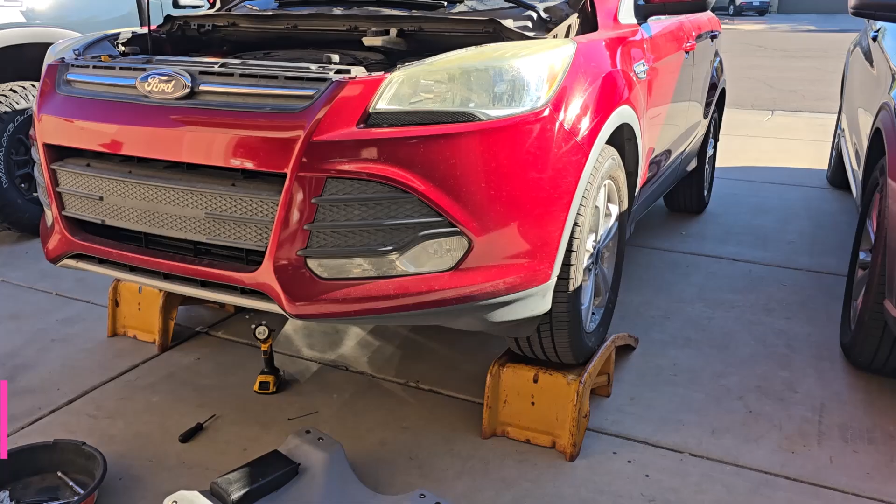Check out this car, let's see if I can find where the boost leak is, because my daughter's still getting some issues with the car. Besides the blatantly obvious failed battery.

This is the boost charge pipe after the intercooler. This is where I mended it before. It blew out right here, so I cut it and put this piece of metal pipe in there with just these two clamps, stuff I had from before for my turbocharging projects. But of course, this is a factory turbocharged car. Looking right there, I believe I see a new split before I even get this hose off. Look at that, that's probably where it's flowing out.

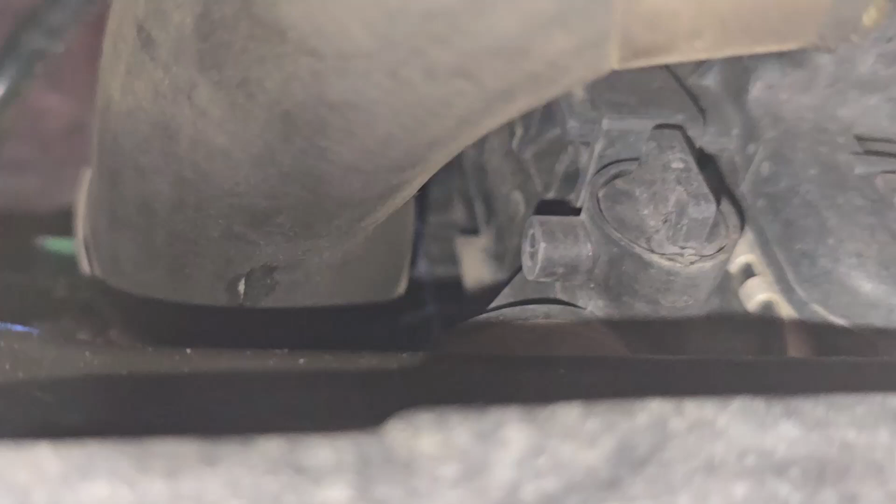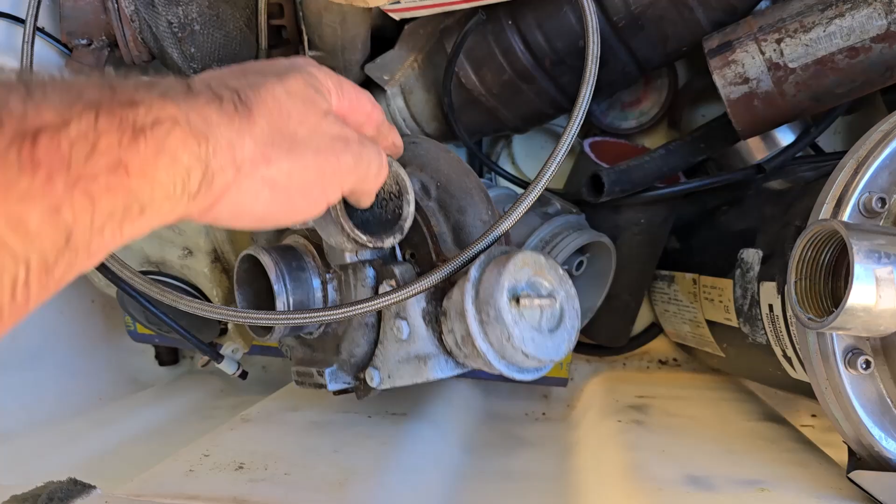So out in the back 40, where I have a tote with some old spare parts from previous projects, there's a nice little turbo. It was on that Saturn. There's the turbo, it was only a T3 flange. That was on that Mustang. There's a 3-inch outlet there.

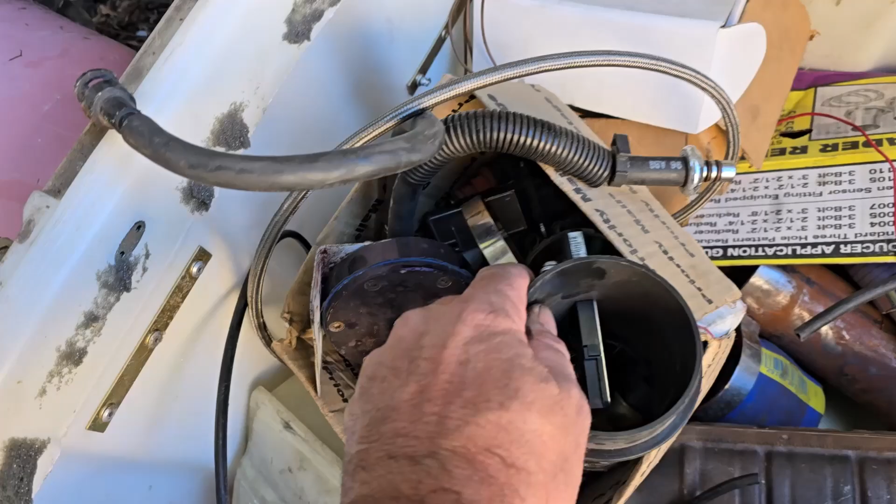Here's the wastegate, the external wastegate. Oh, there's a section of... this might have been the aftermarket airflow sensor. No, that was a stock one. Somewhere here's the aftermarket one, it started melting from getting it so hot. What was this one? Yeah, this is a $300 sensor right here.

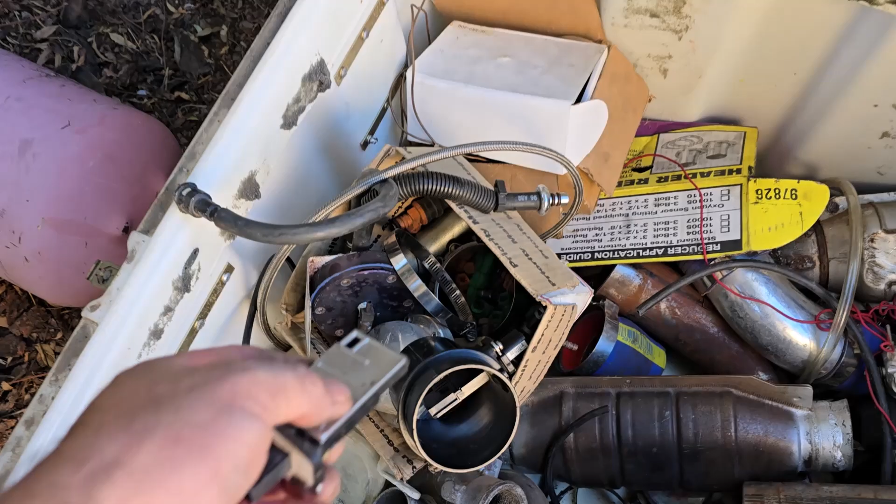Pro M, still good, who knows, might work on that Ranger. Fuel pump, that was a high pressure fuel pump down there. It's been sitting for years now, huh? There's the blow off valve, it was on that 3-inch pipe there.

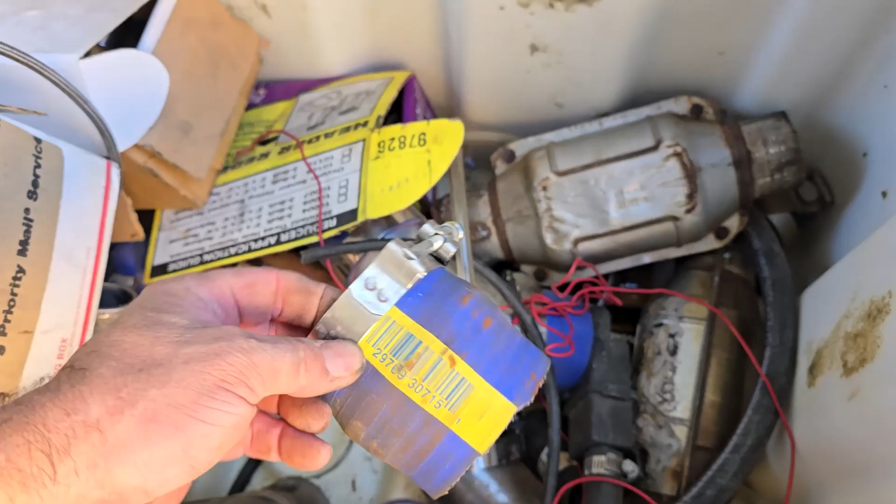We got a converter that's not hollowed out, it's a real one, this is what I'm looking for. I'm trying to see what hose connections. Oh, this is on intake, that was an air straightener I put on there. Air straighteners, after you come out of a turn like this, I kind of like that because I would put laminar flow or whatever they call it across the mass airflow sensor, to get you a better reading.

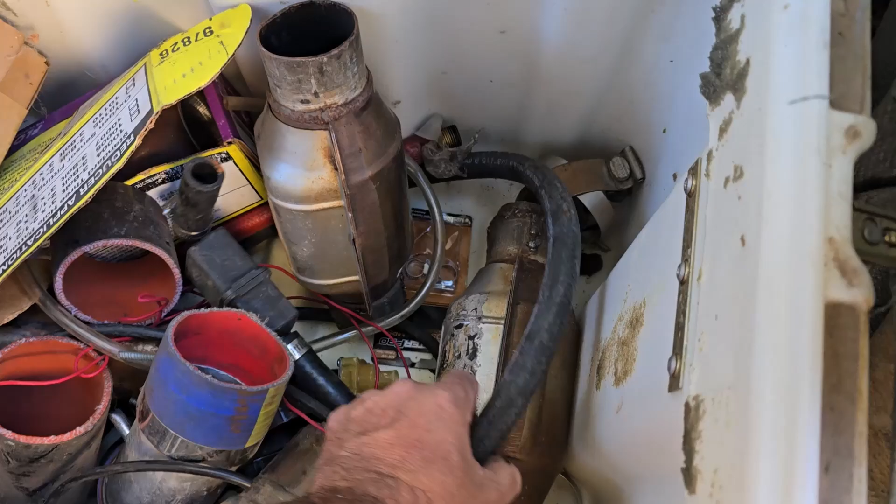So I'm trying to see, I've had rubber hoses, just wondering if I had any of that size and any decent lengths. No, that's massive, that's 3-inch. It is not 3-inch that I got on that. There's another one down here. Yeah, it's all, these are all too big. And there's more cats, these are high flow cats? Yeah, I think those are the high flow cats.

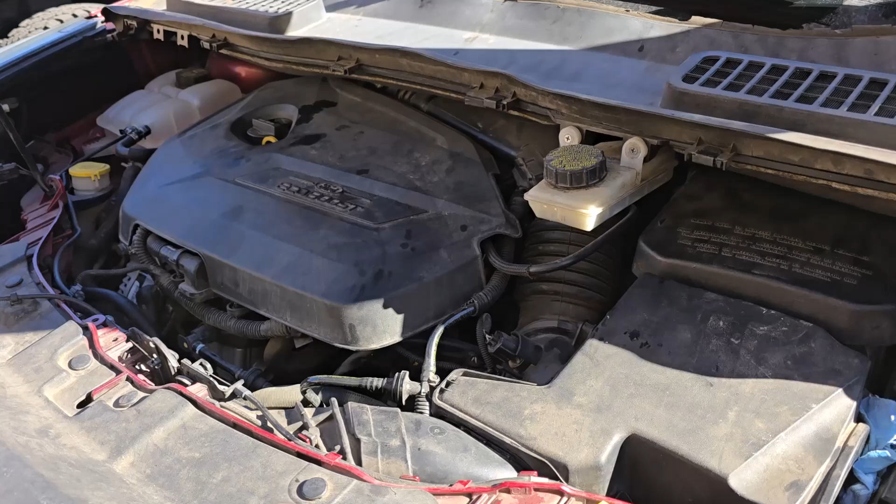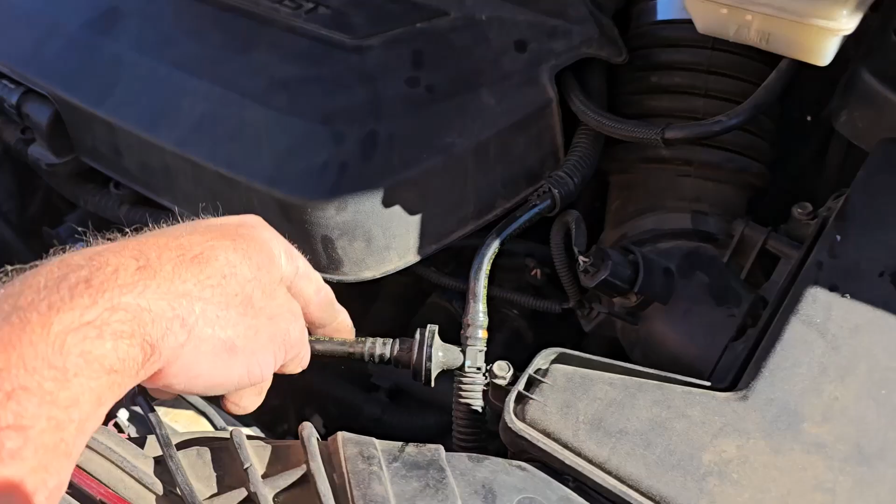So this is the section I'm trying to reproduce. It's been a relatively reliable car because I beat the hell out of it when I used to drive it, and then the wife drove it, and it was sitting for a year, and then the daughter drove it as her first car. She was racing it and beating the hell on it too. But it's just got so much, there's so many hoses, valves, electronic valves, sensors, everything on these. 4-cylinder EcoBoost engine, and it's a front-wheel drive.

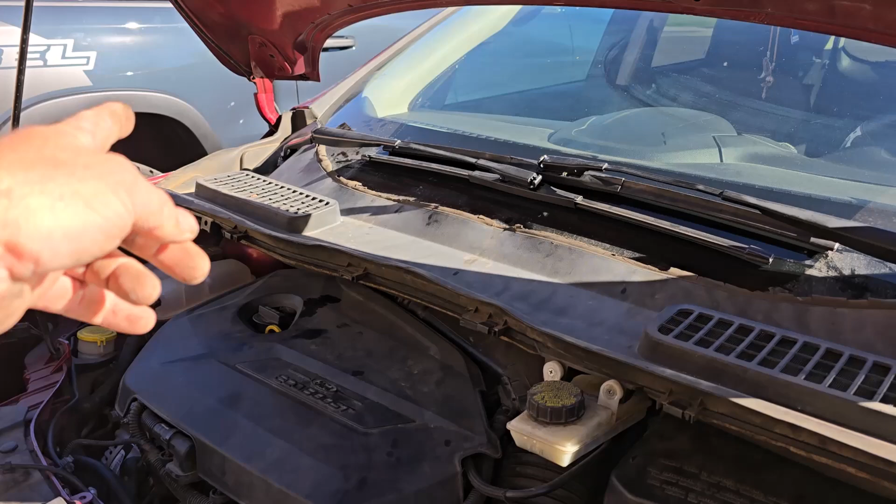4-cylinder EcoBoost in that too, but it's rear-wheel drive, 2.3 liter. So I don't know, now I have a twin-turbo straight 6 in that truck. Glutton for punishment, we have 4 turbocharged vehicles in this household now. The wife's vehicle, the daughter's vehicle, the hand-me-down F-150 I used to have but now this Rebel, all turbocharged, and then the Can-Am in the backyard, turbocharged. Crazy, but turbos are fun.

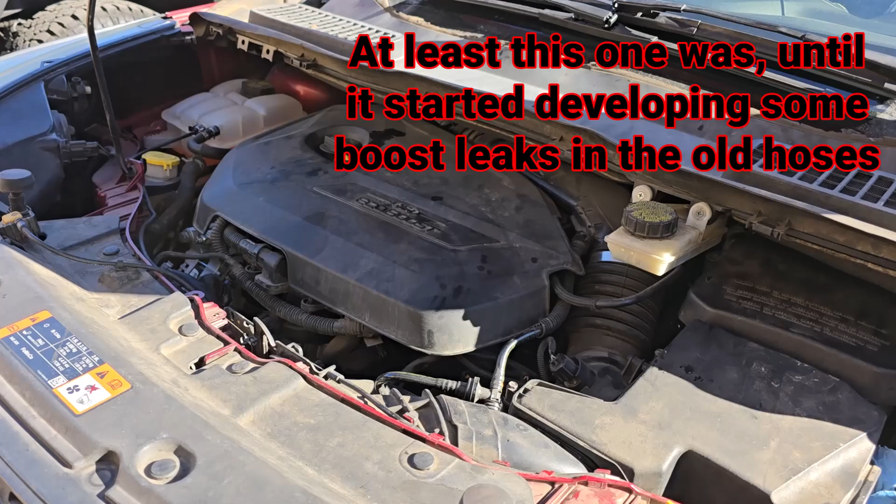And people get mad, say they'll take their V8 over it every day. If I'll take a V8 over that, I'm gonna have to modify the V8 to have power like these have, they just don't. Just like this replaced a mid-sized V6. The 0 to 40 mile an hour range, for the get-go, this turbo 1.6 had an advantage over the V6 counterpart that would have been in a car like this. This is quicker. Once you're already rolling up to highway speeds, it's not. But from the get-go, the torque is so quick on small turbo engines, engines with small turbos, that's just a great advantage.

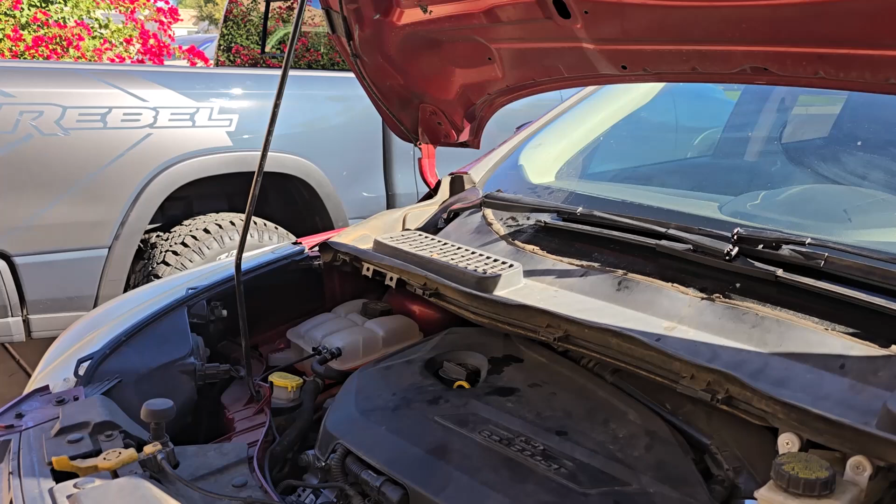So the inline 3-liter in that thing has 2 turbos, one for each 3 cylinders. And I think it's pretty close to 500 foot-pounds of torque, so it's pretty nuts. Those 33-inch tires, from like 25, if I hit it, it spins them. So it's pretty crazy.

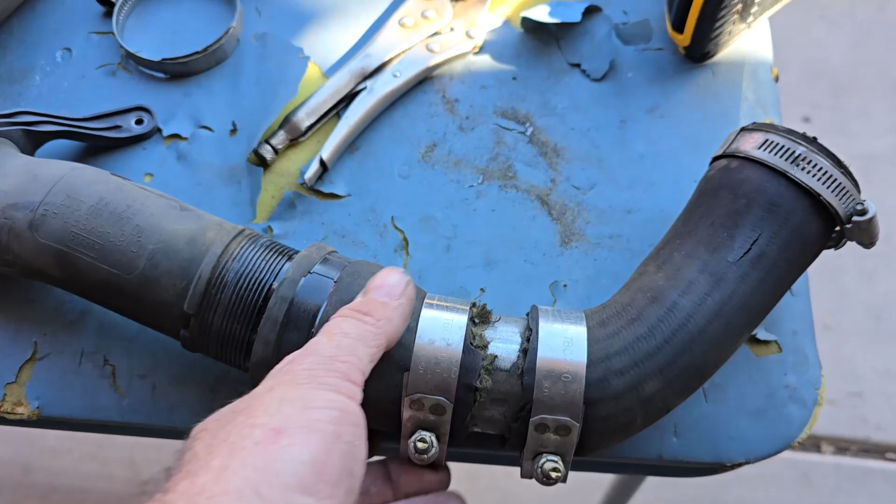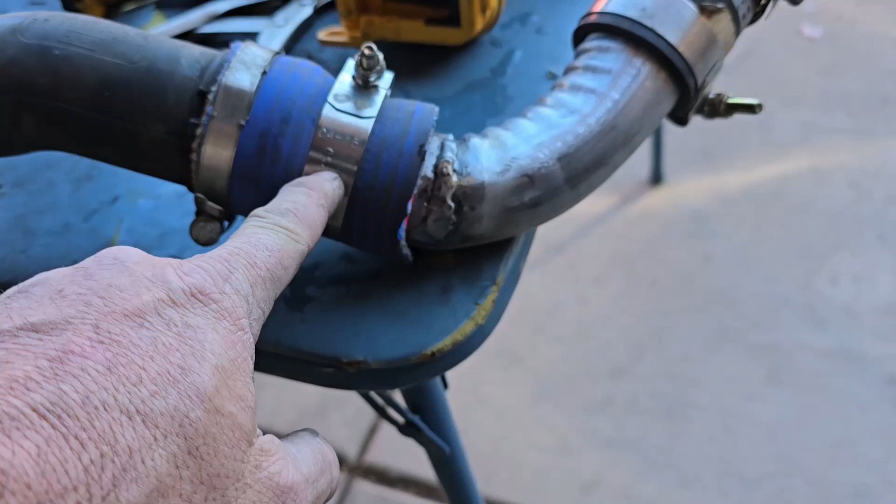So in order to replace this section, you can use a piece of this for 2 1/4, piece of this for 2-inch. It's a bigger pain in the ass than I expected it to be. So here's this part that had the previous patch in it. So you got this reducing down to the bell, and that's on here, and a shitty weld right here when I had to change the angle. I'm going to go up to this cheap coupler here, but it should be okay.

Hopefully get that on the intercooler and get that installed. And a good shot of this without the tubing in there. There's the intercooler output, and it goes to the front up there to the throttle body, that's what that mess is. Well, hopefully this rig works.

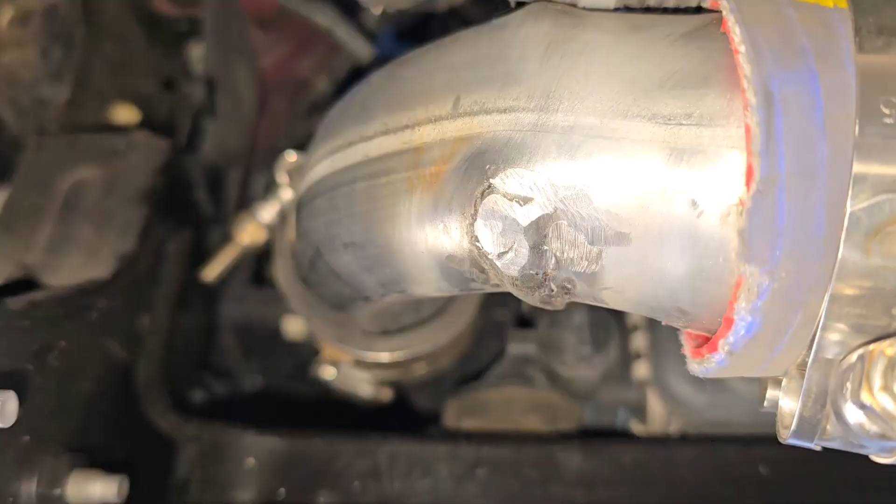Don't see why not. That's a bitch to get to that last nut up there, back in through here - you have to go up through here, because I expect you to take the whole front end of the car off to get to that.

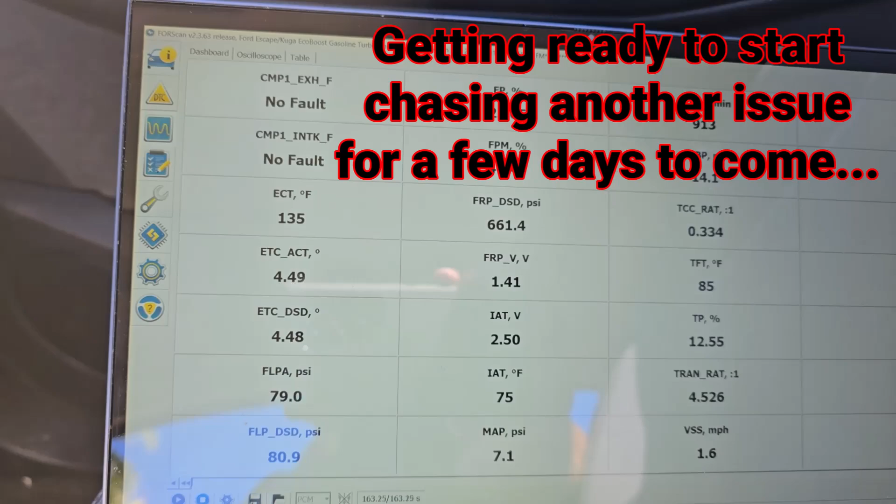That sucks. Got the laptop hooked up with FORscan. I'm going to kind of monitor, especially the transmission temperature. So we put that battery in, and then...

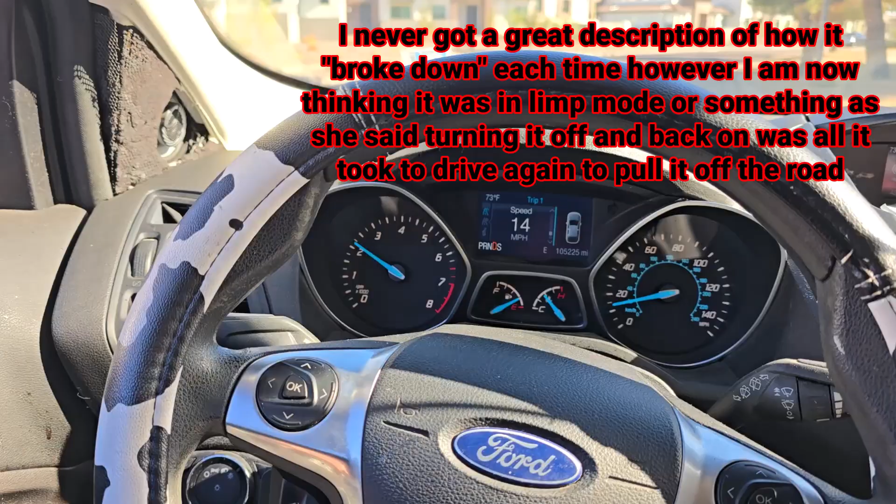Last night it quit on her again. Of course, I go out there with the trailer to get it, and of course it starts right up and pulls onto the trailer fine. But I did notice after we worked on it the other day that there's a major boost leak, which I just fixed I think, and that could be really messing with it.

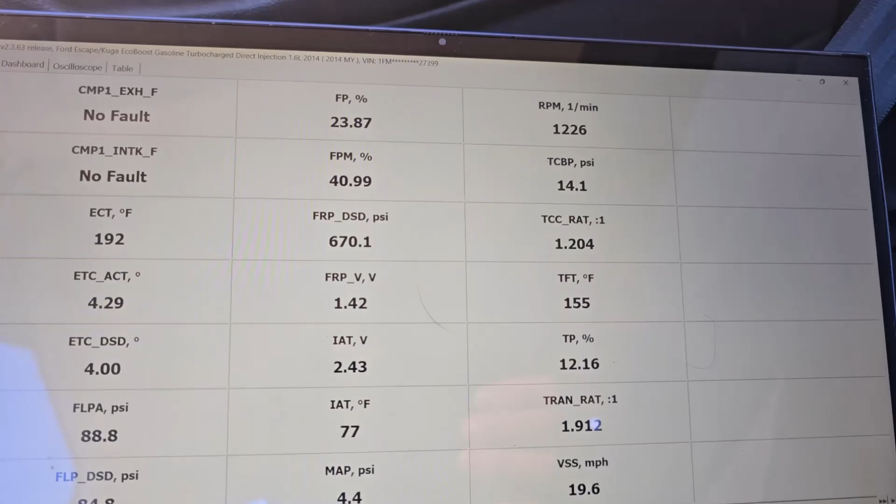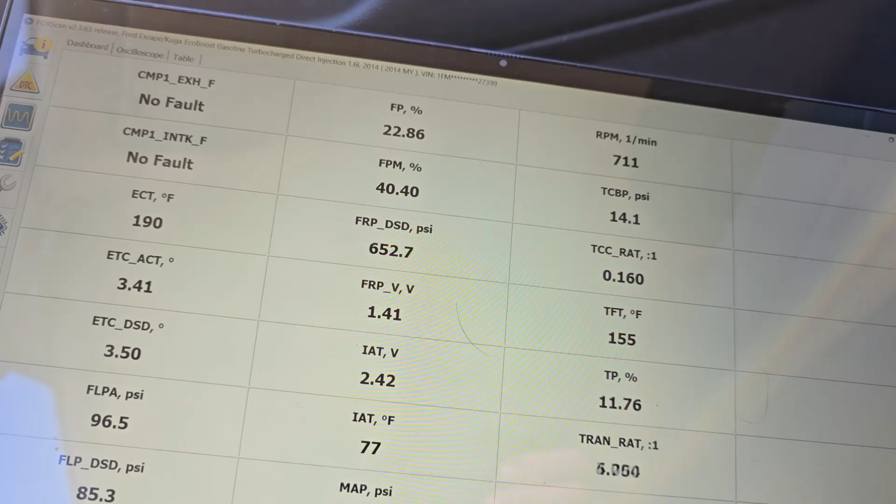One thing that's weird is the boost pressure sensor or whatever, second from the top right - it's reading like 14.1 at idle. It should be reading like inches of vacuum. And then when I get into it, it goes right to like 30 something. That might be an invalid reading.

Which would make it open the wastegate, or control the wastegate based on that. That thing's whacked. Evidently this is not your real-time pressure at that sensor. I think it's like what it had recorded for boost, because this is like the desired boost, and when this increases, this seemed to track with it. So maybe this is just like the minimum it usually asks for. I don't know, but it just seems to not go lower than that.

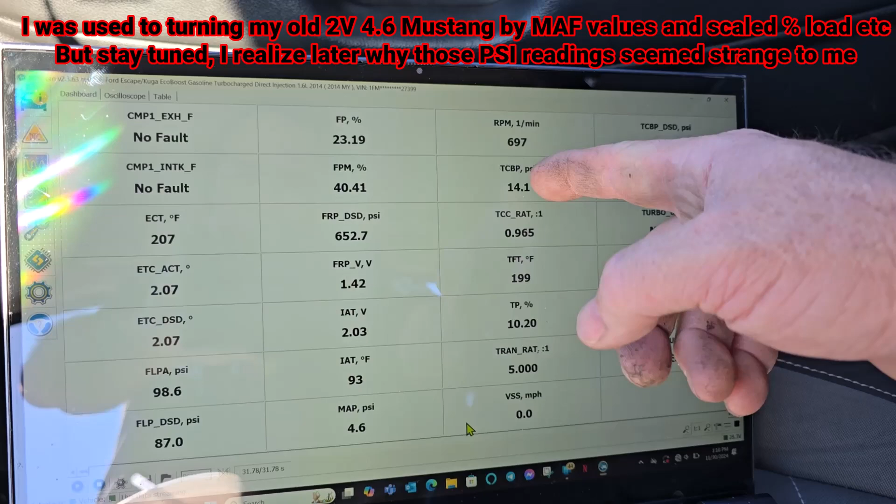So down here is MAP, so it should really be the one to look at. I guess it doesn't read inches, even though that probably is. Let me see if I give it a little bit of throttle, if it goes down or up.

Yeah, tipped over instantly, but who knows? I'll have to keep track of that one.

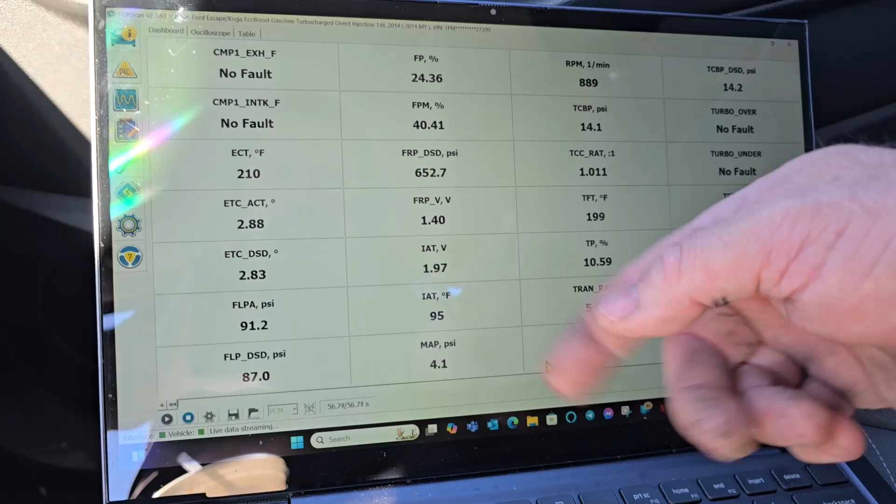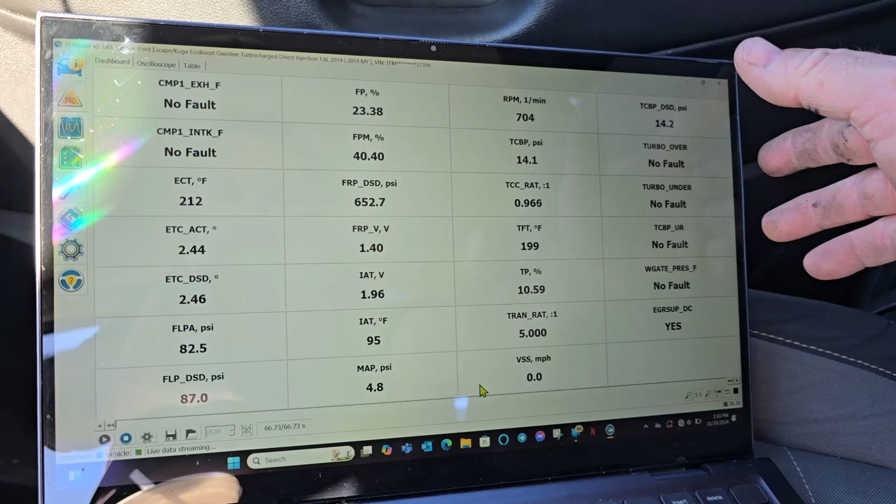So I'm still watching the transmission just getting up to operating temperature. Anything up to like 220 or so, even 230, can be relatively normal. Once you start getting like 240, 250, then you gotta start watching out. She said her car hasn't overheated or anything like that.

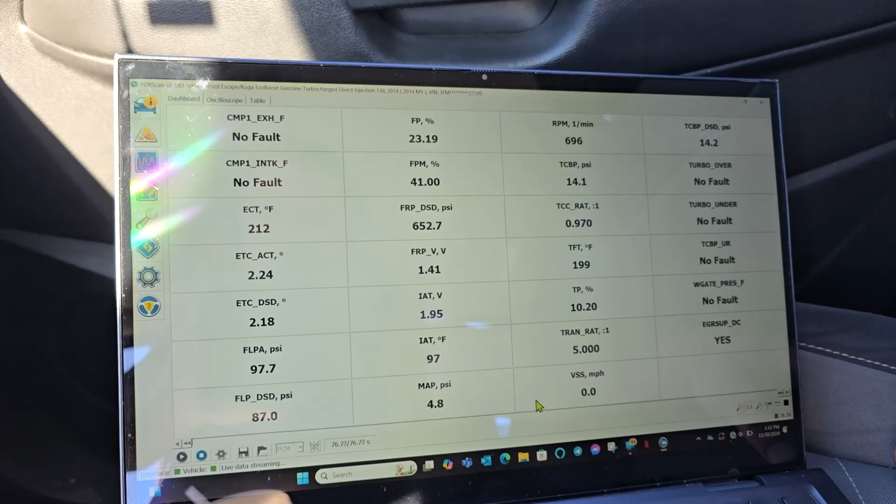So it looks like the coolant temperature is at 210. Okay, been cruising a little bit. Transmission temperature's pretty much been with the coolant - temperature got up to 212. But actually when I turned the corner back there, I just heard the whining sound the daughter is talking about.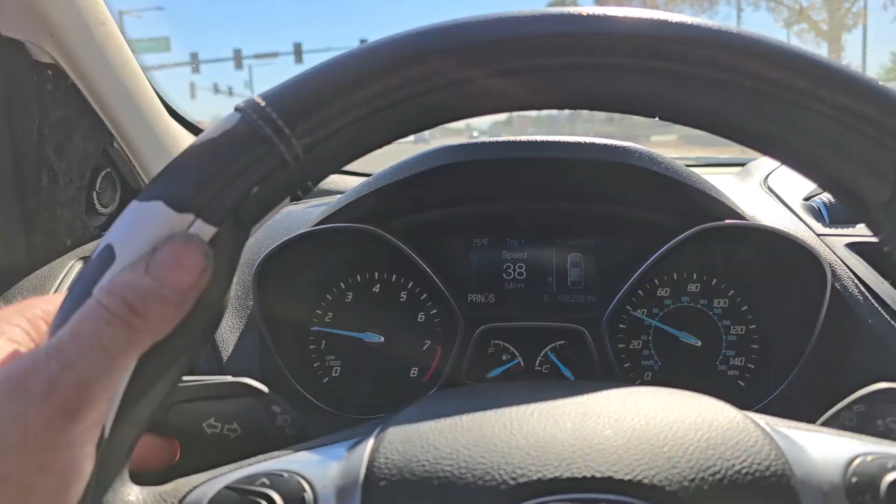And the other day when we restarted to pull it up on the trailer, I did hear a little bit of whining - it sounded like it was coming from the transmission area, which is why we checked the fluid. Okay, here we go, I'm going to turn this corner. Listen to this, it's very noticeable - first time I've gotten to do it when you're driving.

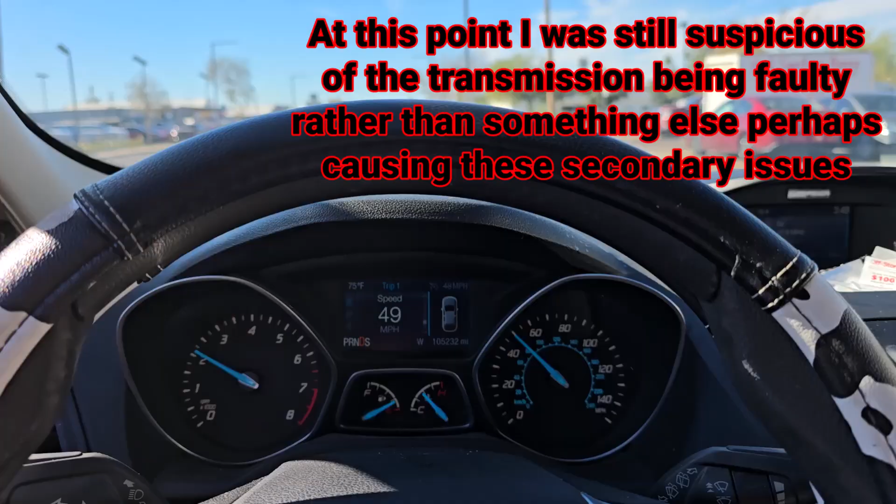After all first three gears, temperature's still not like nuclear. Temperature's totally normal. Weird.

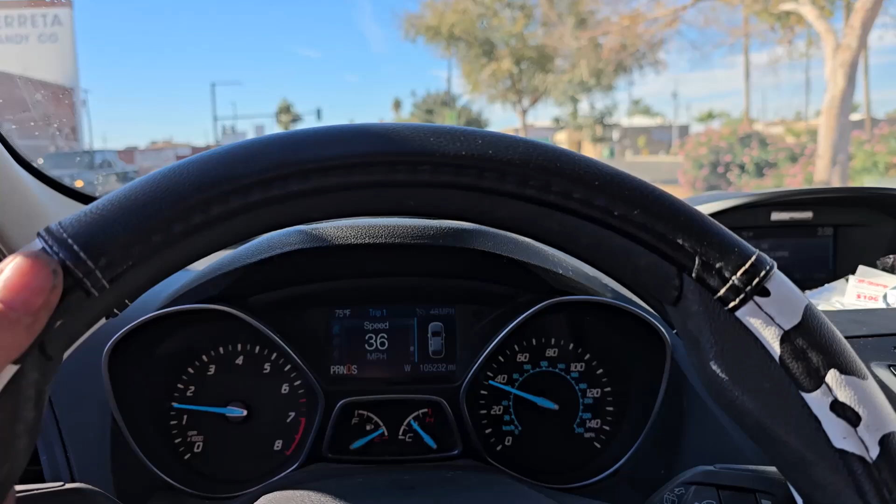That is a weird sound. It's not coming from the front section where the timing belt or anything is, which would be intermittent. It's coming from the transmission side.

Let me listen to it real quick, in neutral, see if it's... Oh yeah. Huh. It's idling okay, so I'm wondering if the transmission actually does something weird. Who knows?

220, it's not bad - depends on where that sensor is too, though. Yeah, it does sound horrible.

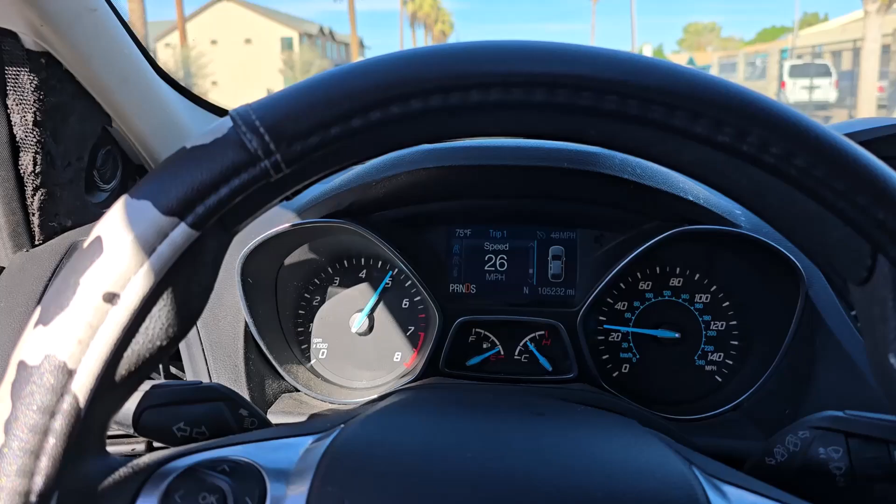So I'm trying to get it to act up, and I think I'm probably getting close, because she said it starts making that whine sound. But then she said it would act up - in stop and go traffic it shut off, or she couldn't go for a second, or she turned it off and restarted, and then she was able to pull off the road.

Now imagine, she probably wasn't doing all this once it's acting up - she's probably just driving it normal.

Notice that the transmission fluid's starting to creep higher than the coolant - 231. Coolant just dropped to 187. Keep an eye on it. Temperature keeps going up and down, but pretty much in the normal range.

Still got that whine, still got a surge - barely touching the throttle and feeling it just vary the power. It's kind of weird, sometimes I think it's almost putting more power than I want.

Oh yeah. Wastegate messed up? I don't know, I'm just barely touching it. It just seems like it should be a little slower.

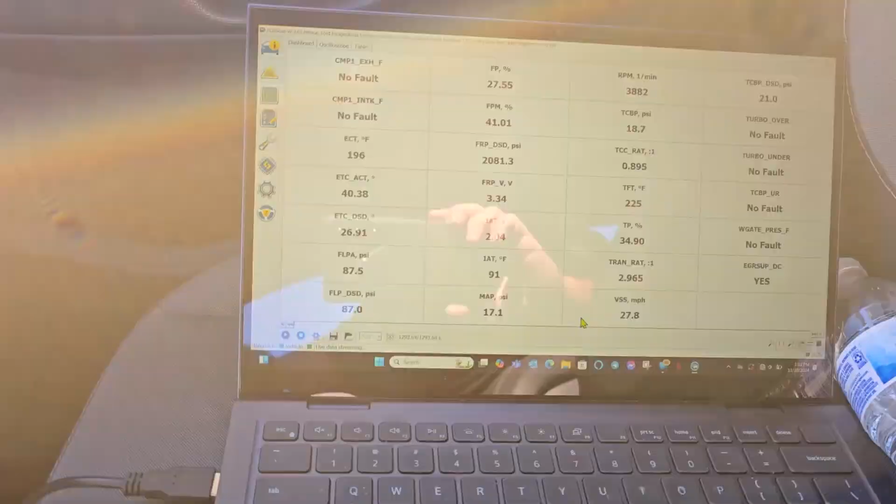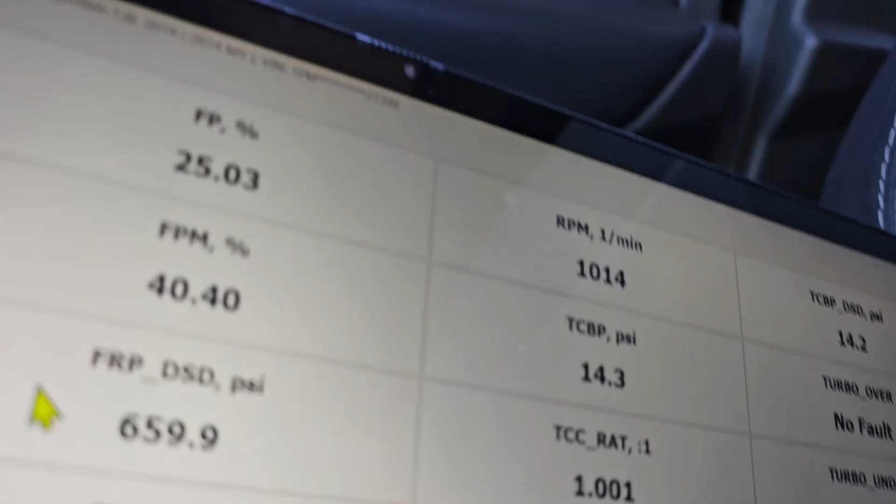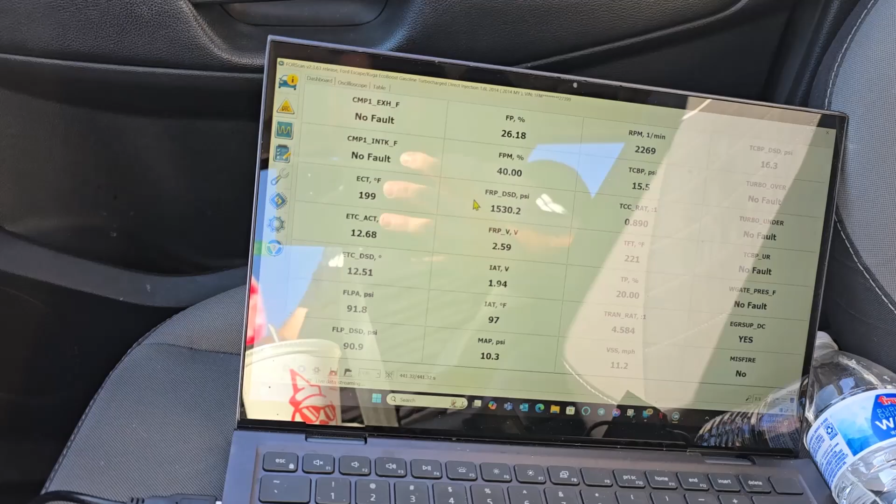Unless it's still leaking turbo boost somewhere, it's just not making the pronounced hiss that I was hearing before. It's probably got more than one leak.

Who knows? Okay, looking here, this is FORscan. I have it installed on my main PC, which I'm not using to connect to the vehicle, but it allows me to look back at the logs. So here's one I did the other day. The oscilloscope's the nice one, but I haven't figured out how to look at all the values. Seems like only the top ones and everything you selected to record is going to be in there.

So there's throttle position and accelerator position. Now these are two key ones to look at here. Transmission slip ratio, fluid, all this stuff, wastegate, a bunch of different things I was looking at in different logs to figure out what's going on. Basically I started getting some clues at one point.

The oscilloscope only goes down to the fuel rail pressure, which is right here. Now when you play this back, it'll populate, and it goes in seconds. It doesn't go in time, it goes in seconds from start to stop. So this is only 118 seconds. I did a couple short ones, so this is I got on Grand Avenue, so I could kind of go up the way and see what was going on.

So right here we're going to see some stuff. This is applied, like the foot pedal, and this is the throttle blade, the actual motor driven throttle blade following it. Right here it does the same, it follows. But look at this, when I get into the throttle and it builds boost, what's going on right here? This is the throttle blade going open close, open close.

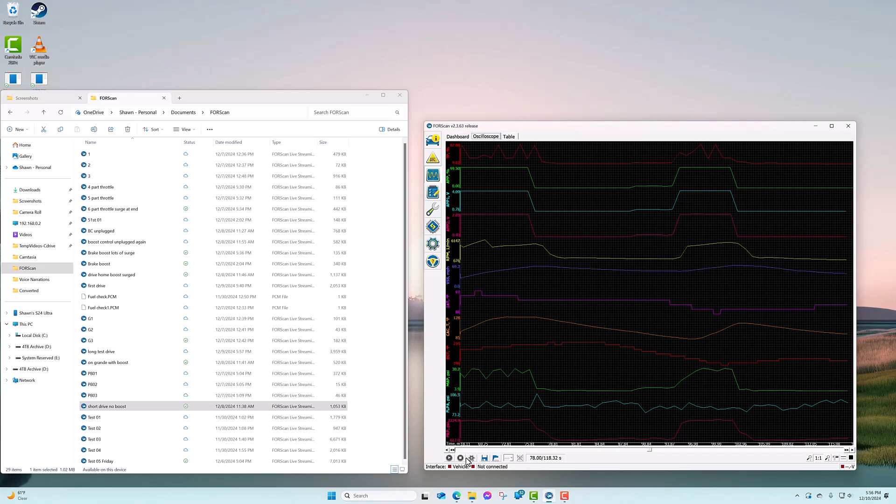Oh, I was unplugging and plugging in the electrical plug to the boost controller, which actually was pretty interesting. BC, what was that? Unplugged. How long was that one?

Yeah, we gotta do this to see everything. Look at this, every time I got in the throttle—this was 174 seconds, so about 3 minutes—whenever I got in the throttle, it just tracked it each time, and I didn't notice any of that other nonsense.

Let's go to another one. I think I have another one with the boost. What was that one? Boost control, unplugged again. This is probably a longer one, 132 seconds. But each time I hit the throttle, look at that, the throttle blade just follows it.

I know I had a longer one, I actually drove it around a little longer. Is that one I already did? That's the one I think I already showed you, but it's 240 seconds, so that one's a little longer. It kind of tracked it. I think I changed up my log a little bit here, moved everything around. But the RPMs also go up and down just slightly when it was wigging out before. So that's basically what we had going on there.

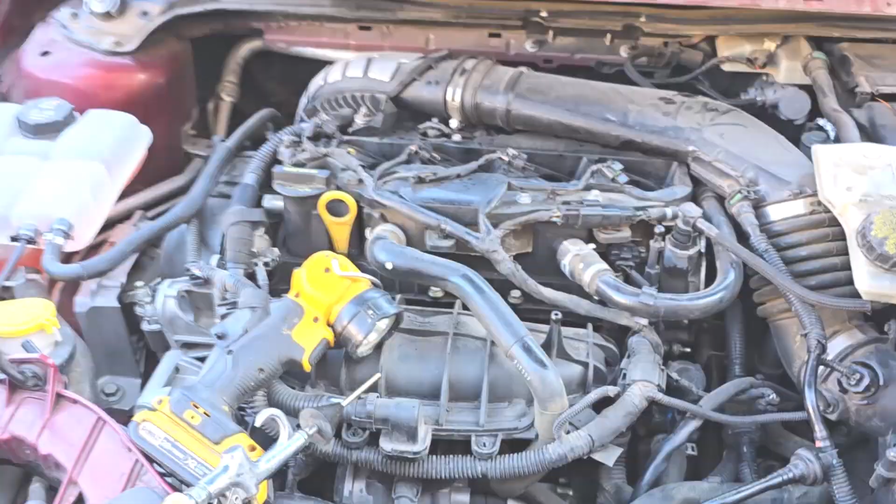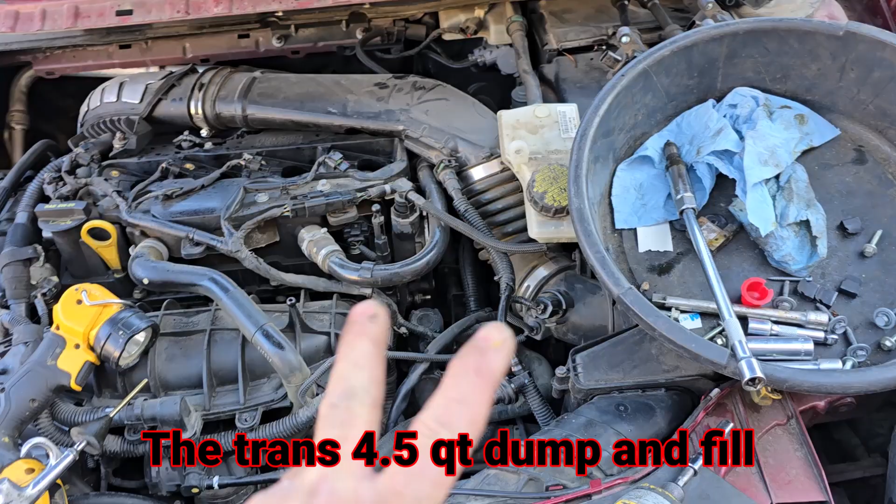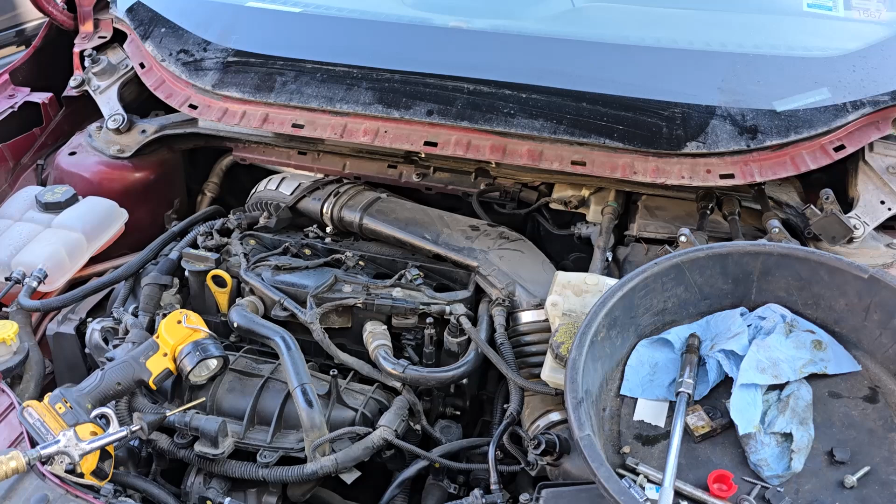So I got my daughter's Ford Escape and fixed another patch down there on the charge pipe to the throttle body. I drained the fluid and topped it back off again, so that's 2 times we've done that in the last week or so, hoping the torque converter will stop whining, because it still goes through all 6 gears and doesn't slip, not anytime I'm driving it, but now it's got a weird surge. When I'm accelerating you can feel it surging. I thought maybe that's the torque converter, and I was about to give up on this car, pulling the transmission and everything, but then I got looking at it a little more through FORscan, trying to make sense of some of the data logs.

I just did a couple little runs up Grand Avenue, and I forgot to turn on the ones for individual cylinder acceleration—that could be a good clue if one of them's dropping out, maybe under compression or something weird. No fault codes or anything, kind of weird. So many sensor values to look at, and sometimes you load the wrong ones and it's just not very clear. Boost, wastegate position, something is making it start accelerating and then lose acceleration. It's like a surge—you can feel it pulling, then not pulling, just like a surge as it's accelerating. I get to higher speeds, 50, 60, 70, where I could stay in the throttle, like going up a long stretch of Grand Avenue, and it almost doesn't accelerate.

It's like you're floored but it's kind of like meeting a wall, and you can feel it pulsing with the power. It's weird. So I just got done pulling spark plugs before I go do another run. I thought, well, I don't think I've ever done these—maybe I have, but it was a long time ago. There's a bunch of gobbledygook down here at the base, which is normal for the O-rings and seals over time, but all the electrodes just look well seasoned. Maybe I should go get some spark plugs and replace them and take it for another drive.

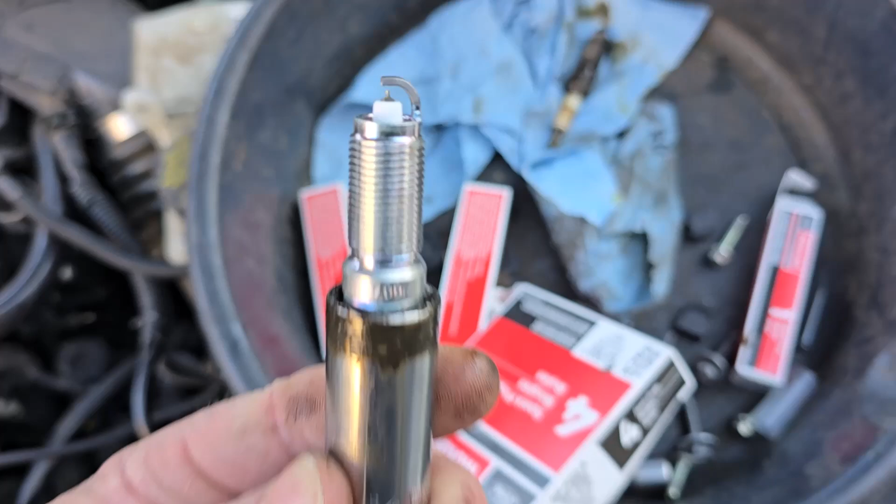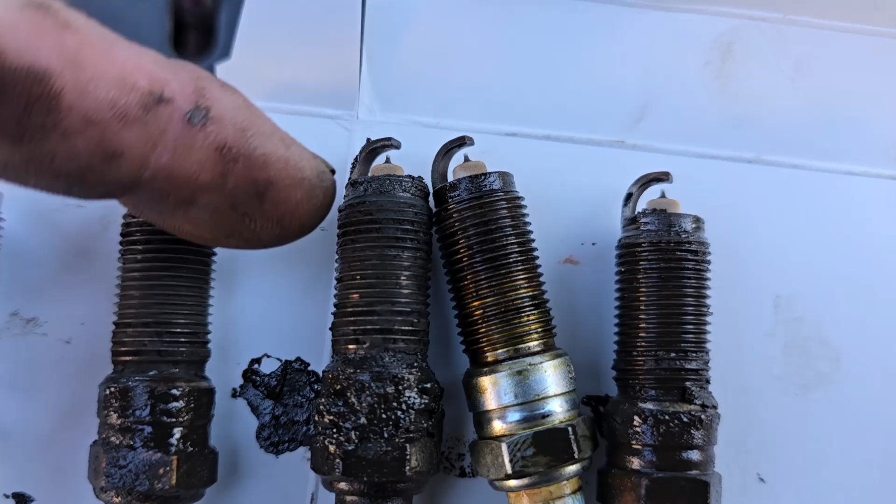Okay, just picked up some Motorcraft plugs, will look a little better than these. Again, those weren't fouled or anything, but you never know—could have cracked insulators, anything like that, or it could be blowing out the spark under high boost. Okay, there's what they all look like. A lot of the grease up here is just from threading them back in—plugged the holes while I went to buy some new ones. Porcelain and the conductors are what counts. This grease also I've got on from removing and installing.

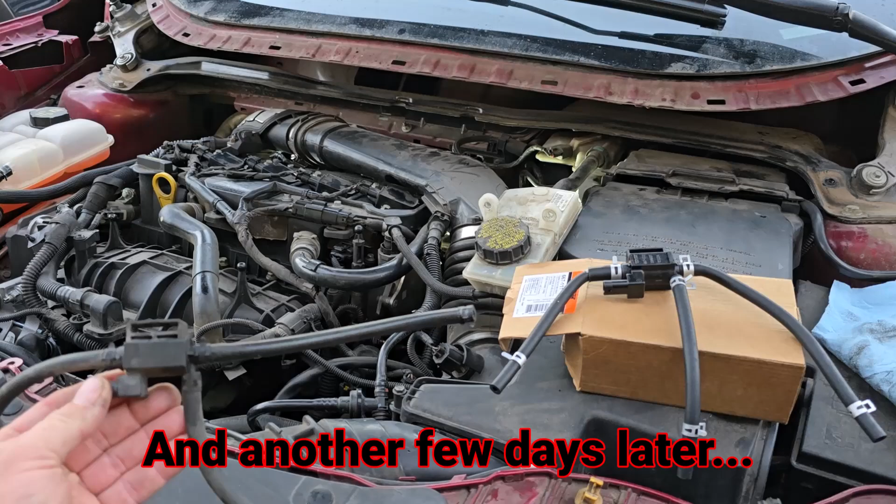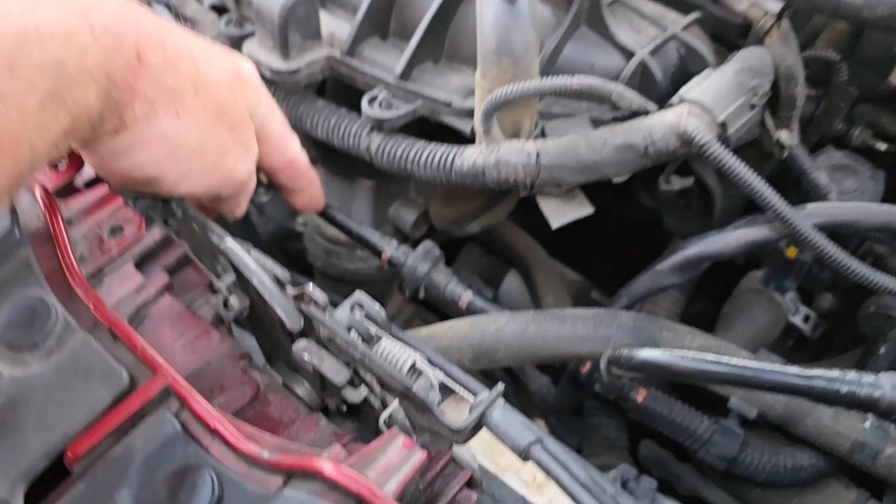Doing another repair on the daughter's car. Maybe I'll show some data logging on the screen here, driving down the road using FORscan. Some things I noticed: we get the surge going up and down, and RPMs kind of go up and down about 100 or 200 at a time, every half a second or so. You notice that the electronic throttle blade on the throttle body is being commanded to open and shut every half a second, meanwhile the throttle pedal is showing consistently held open.

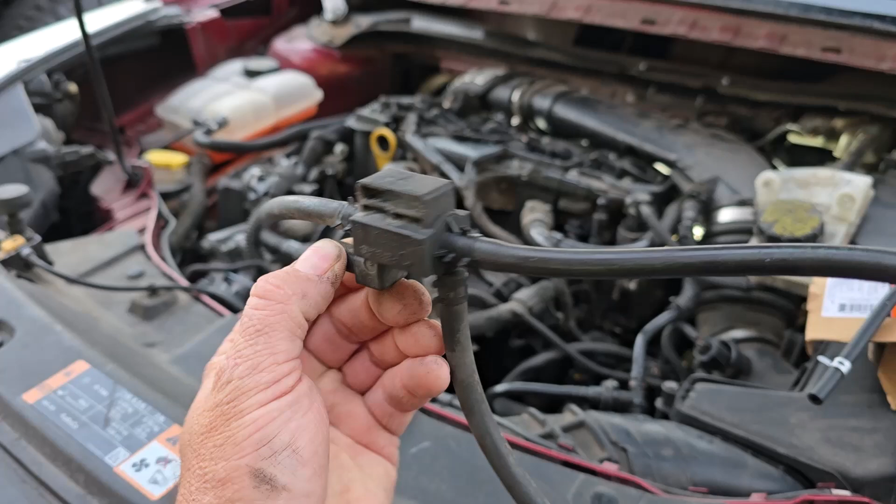So, I think it was overshooting its boost. I saw on the internet that these wastegate control solenoids fail like regularly, to where you're supposed to go through a couple of them in the life of your vehicle.

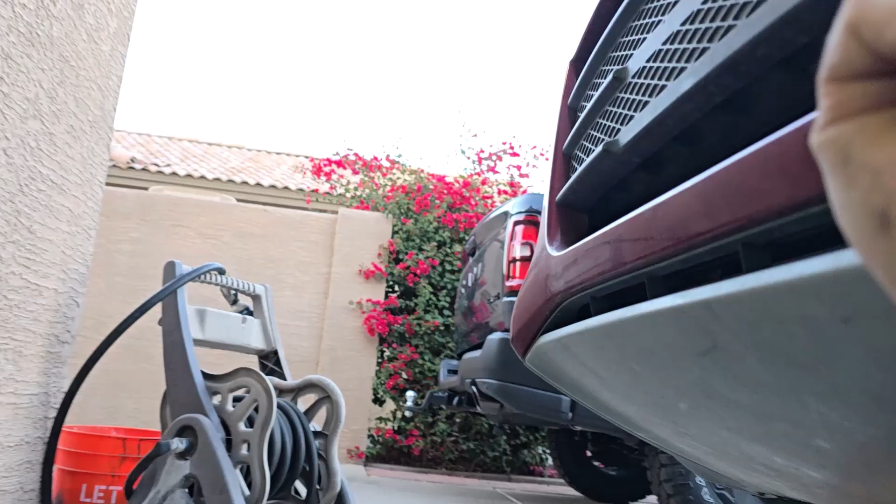So, 100 and something thousand miles and we've never changed it, so I'm hoping this is going to be it, because I did mend a hose right here. I'm hoping there's no more leaks. It does seem like it initially builds up the boost, and I don't hear it leaking there, but I can see the fluctuations on the pedal, which I think is also the blow-off valve, which is an internal blow-off, actuating back and forth whenever it drops the blade.

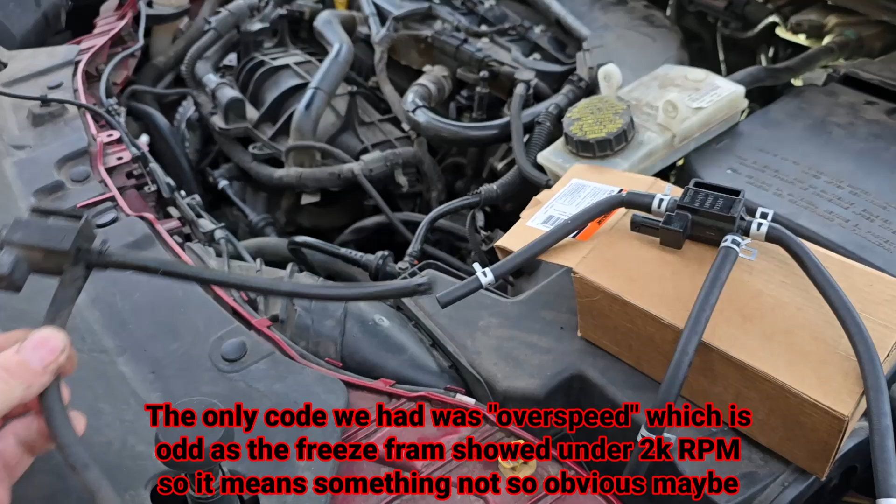I think that's what it's doing to keep it from overboosting maybe. So I unplugged this solenoid with the hoses still connected this weekend and drove it, and it seemed like a lot of the pulsations were gone. It had a lot less power, probably because it's just running on the wastegate spring by default, so it probably pushes straight through, I'm guessing.

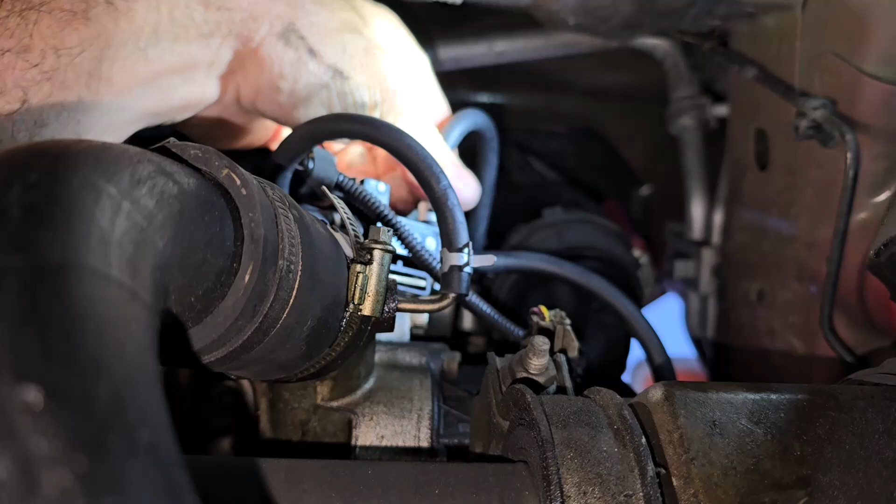Okay, underneath the car here, it's a little fun. So that is, it's right up here. This is the wastegate solenoid boost controller, whatever you want to call it, right here. The hose on the wastegate actuator. This one over here, it's actually not the charge pipe, but it goes to the atmospheric one, the inlet to the turbo. This one on the left, remember left goes to the charge pipe, which is right here.

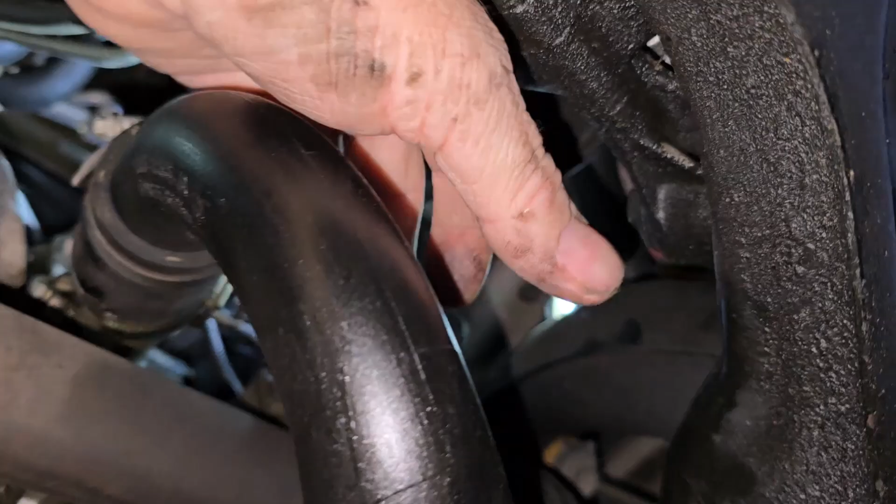So it's got a little bit of oil and everything, starting to just seep a little bit. I'm hoping all these hoses are still good. I haven't seen any, so this is the one I mended, with some coupler hoses I had, and then this exhaust pipe I cut and welded to make it a sharper turn. Get that flashlight out of here.

Of course, anytime you're working on something on the backside of the engine, you always want to take off this cowl piece, because it actually gives you quite a bit of room back here. See all that? Turn the light on. There's the turbocharger wastegate actuator, and right there's the controller we just put on. Almost could have done it from right here as well as underneath.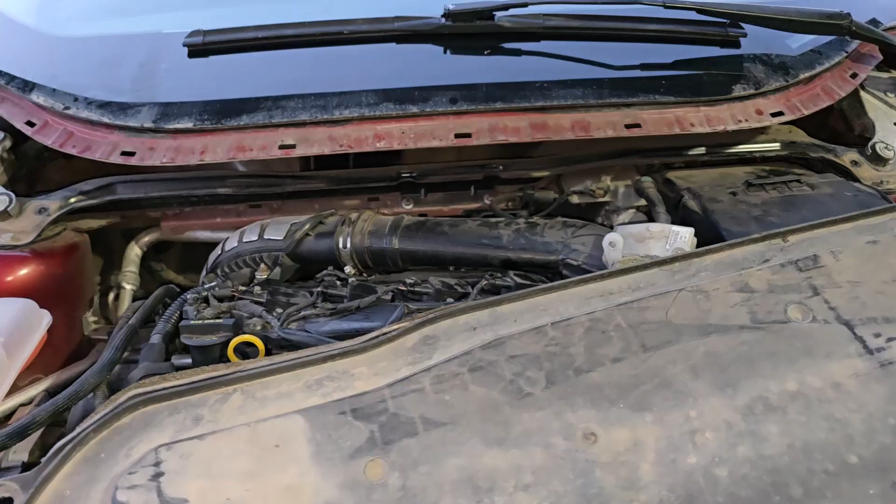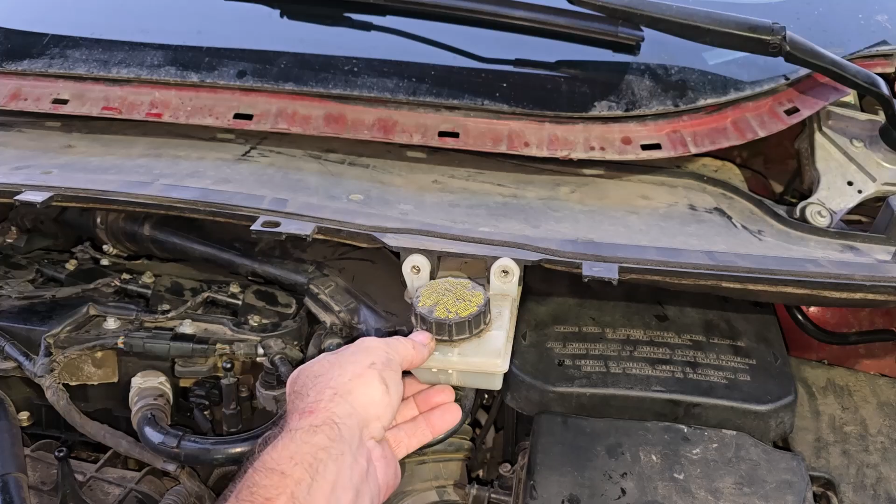So I've seen imports and stuff, like those older Chrysler/Mitsubishis, those used to be way harder to get back there. They have a lot less parts than this. So this just bolts on with 4 10mm bolts. I just kind of put it back on just long enough to hold the brake reservoir when I do test drives, before I put everything back together.

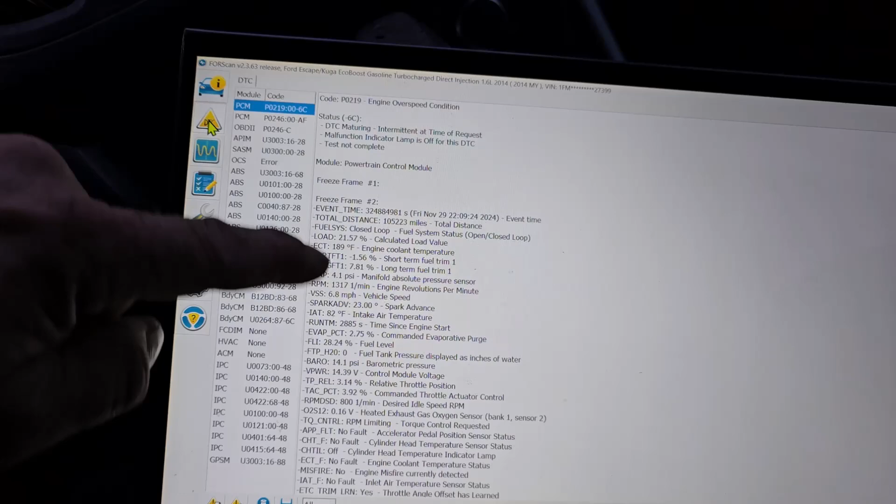Okay, before I delete some of this stuff, this is some of the things that were in here before. Now, we did just pull the battery for a while and put it back on, but still had this stored in there, just like your freeze frame. P0219, engine overspeed condition. Yeah, it's got a... oops. Can't scroll that way, but anyway, I think that's all it has.

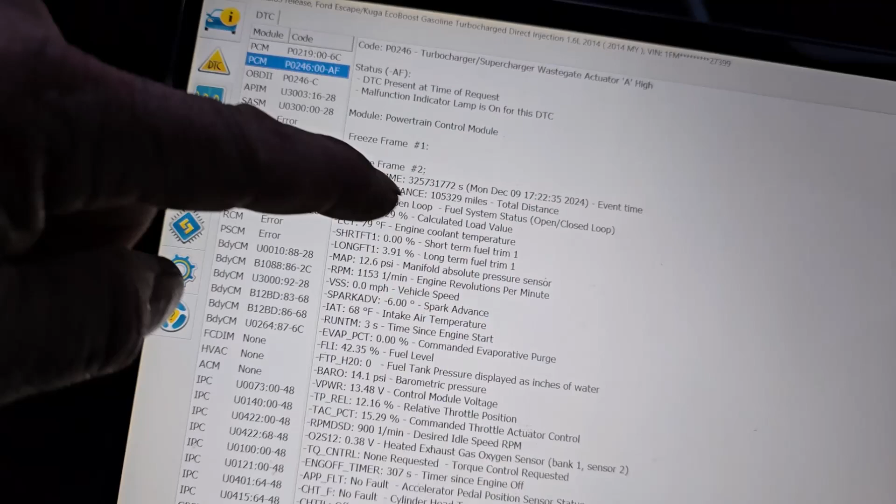Oh, here we go. Oh, this is from me unplugging that. We got a P0246, turbocharger wastegate actuator A high. I think that's just from the open circuit when I pulled the cable off of it the other day to drive it over the weekend. And it should be, yeah, it says Monday. Well, that's now, but...

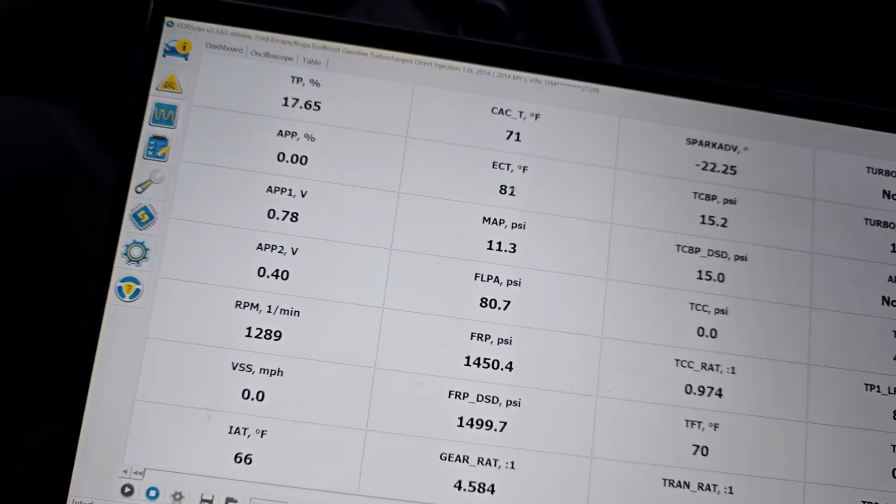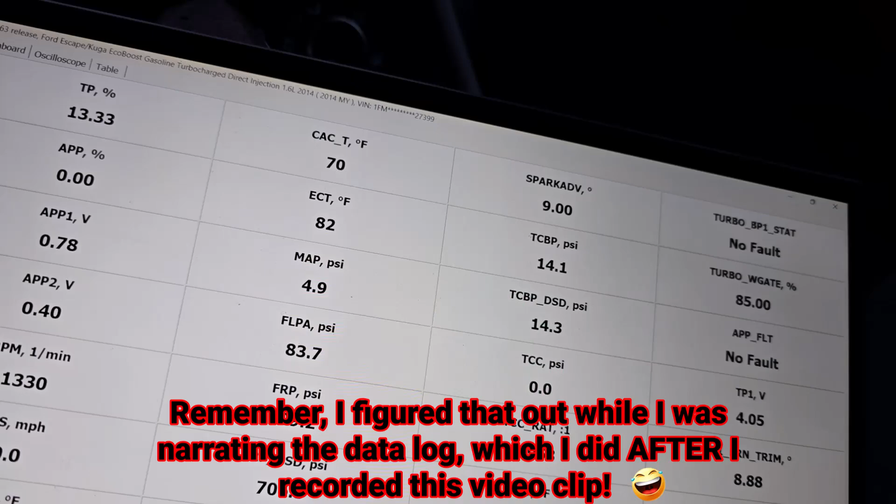The other thing I don't like is the MAP sensor. Why does it show pressure even though you'd think it should be in a vacuum? And then there's desired pressure and actual pressure. I mean, they're matching, but... I don't know, weird.

You don't want the engine cover on or anything? No. Got the codes to reset. Always have to remember the order, it tells you to put it in high speed and regular medium speed, or whatever MS and HS mean on that switch on the OBD2 interface. So alright, I'll go take it for a ride. Just put all the trim back on, engine cover.

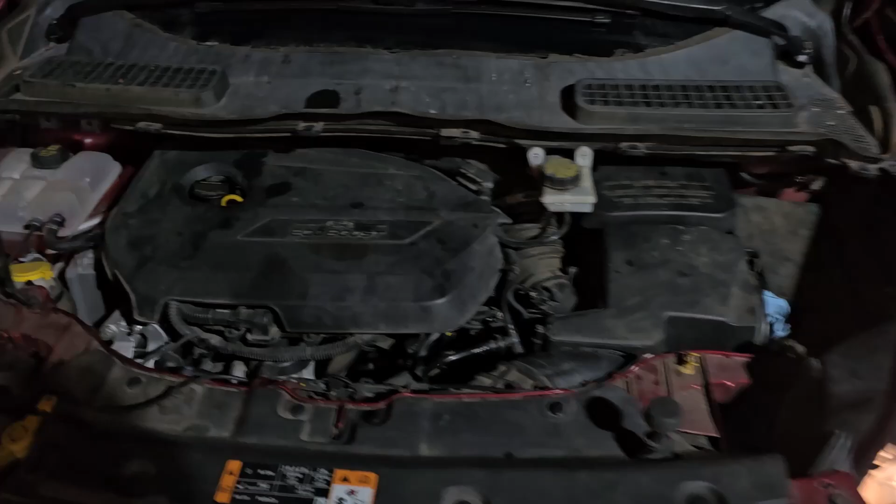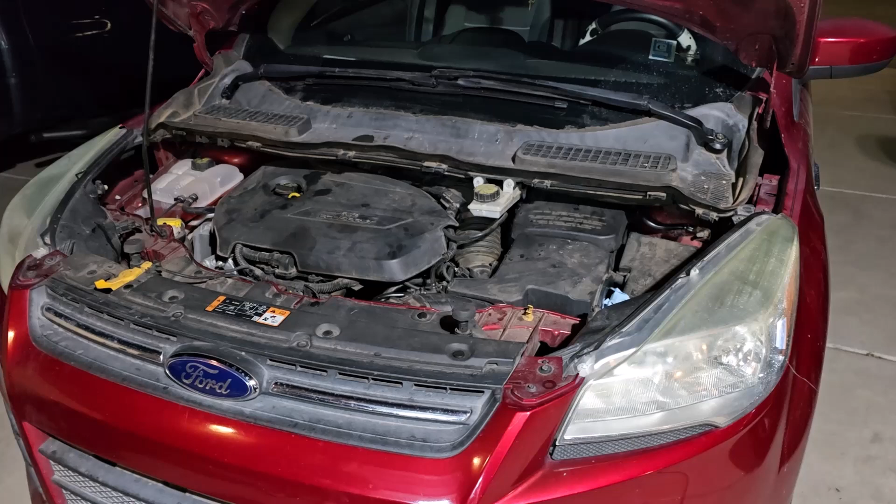Should be good. This car is well aged now, but we just took it for a test drive and it pretty much drove normal. Don't know if it has the same power it originally had, but it was running pretty good. So I'll take a look at the data logs, put those on the screen.

By the way, just had to stop the edit because I got to go do something. But I was just laughing, this shirt I just got out to wear — this is pretty much the one you need to wear when you're working on cars like that. Boost fixes everything, or it breaks everything. Either way, it's awesome. Sometimes you don't feel that way, and sometimes you love it.

So, got 4 boosted vehicles right now, which is insane. Never thought I'd ever have a boosted engine, and I've got actually 4 right now, even though all 4 are stock at this time. Done 2 boosted applications, vehicles that weren't — nothing crazy, but just for the fun of it. But now I've been used to just having turbos.

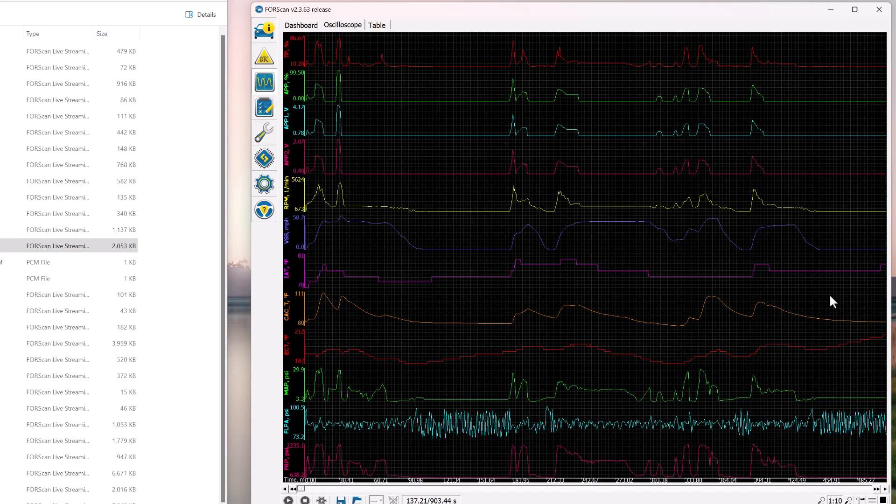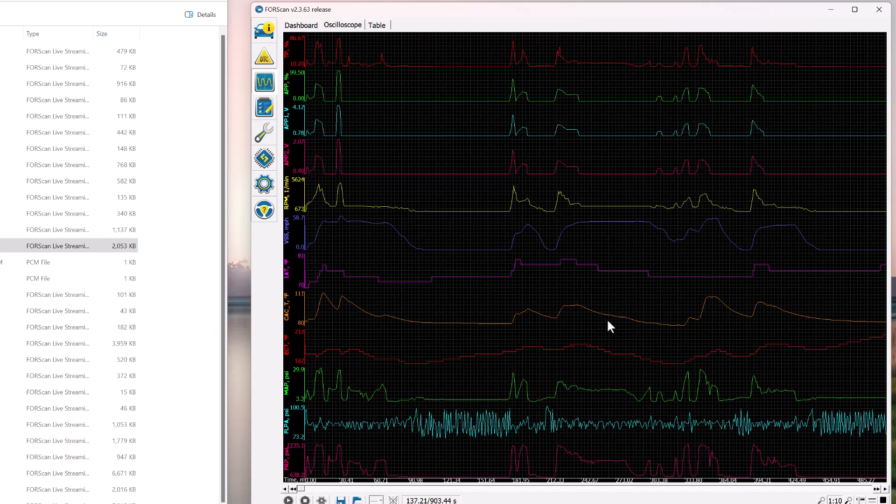The daughter drove the car all the way downtown Phoenix, then came back and just met us for bowling, which was all the way to Peoria, and she said it's doing pretty good, the car's doing pretty good. So the last couple things I did helped. Transmission seems to be kind of holding in there after all. At first I kind of thought maybe that torque converter was shot, man, thought that fluid was black - the last video I put out showed that fluid. So anyway, I'm gonna finish this video.

Hopefully this Ford Escape will live for another day, at least for a little while. My daughter was already mumbling some about wanting to get a small car payment - she's just starting college and stuff, don't need that nonsense. And I just got myself a steep vehicle payment myself after being pissed at the Jeep and trading it in. That's another story I haven't made a video about yet - recorded some clips, but I haven't done anything with them.